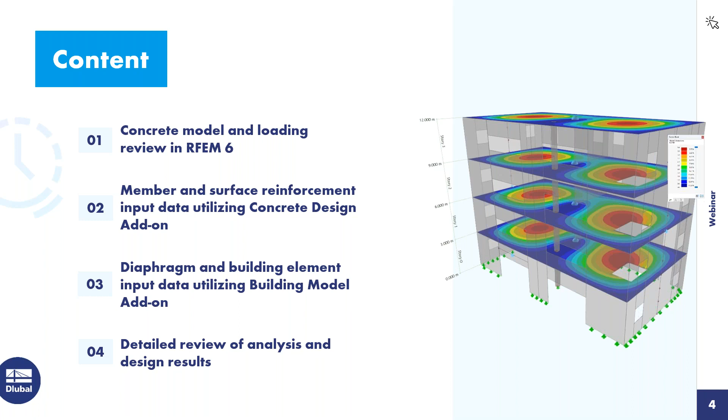And finally, throughout the presentation, we will be running both the analysis and design and taking a look at the results in more detail. So we'll immediately begin within our main program, RFEM 6 here. As you can see, I've taken the liberty to already model our concrete structure. But if we visit our base data by right-clicking on the model name, when you begin a new file, you will give it a model name. The type of model will be in a 3D environment, for example, today.

And under the second tab are our various add-ons. So RFEM is responsible for the full analysis of our structure. But if we wanted to take this a step further, and in particular today, to carry out the concrete design according to the CSA standard, then we would need to activate here that concrete design add-on. Now, under this third tab, you can see here that we will generate the load combinations automatically according to the NBC that is selected here from our dropdown, but many other international standards are also available. We also will be utilizing the 2020 standard.

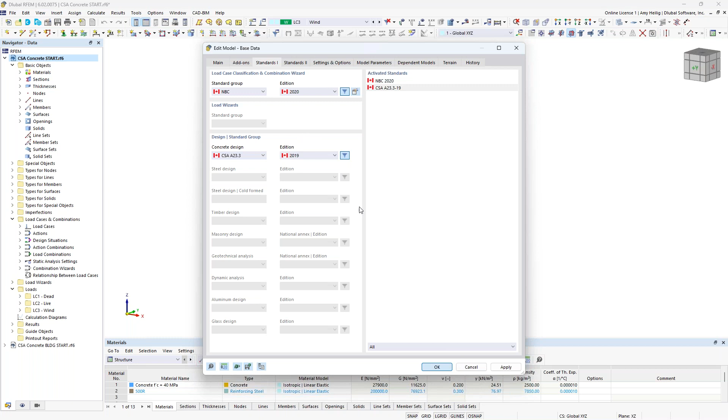As far as the concrete design, we will be carrying out the design according to the CSA A23.3, the 2019, but if you do have access to the concrete design add-on, you will also be able to run your design according to the ACI, the Eurocode, or other international standards offered. So once this information is input, we can go ahead and jump back into the main program RFEM here to review the model input data. And we'll begin with our materials. So over on the left-hand side, you can see that the concrete compressive strength that I'll be utilizing for all of our elements today will be 40 MPa.

If I double click on this material, I wanted to point out that the material type is set to concrete. And when we do this, we have an additional tab here to specify the creep and shrinkage properties of the material as well. So this will come into play a little bit later on with the long-term deflection. Now for our example today, I'm going to leave these options turned off, but just keep this in mind for those specific concrete materials. I also have here defined the reinforcing steel material, 500R. This will come into play also later on as well with our reinforcement input data for our elements.

So in addition to the materials, we also have our cross sections. You can see that I actually only have one cross section defined for our members, which are the columns kind of running up through the center here of our structure. And double clicking on these particular members, you can see that the member type is set to beam. So this would be any standard beam or column element. What also may be common with concrete design is the member type rib. So we can actually place a beam element below the depth of the slab here, integrate the internal forces to design this as a T-beam.

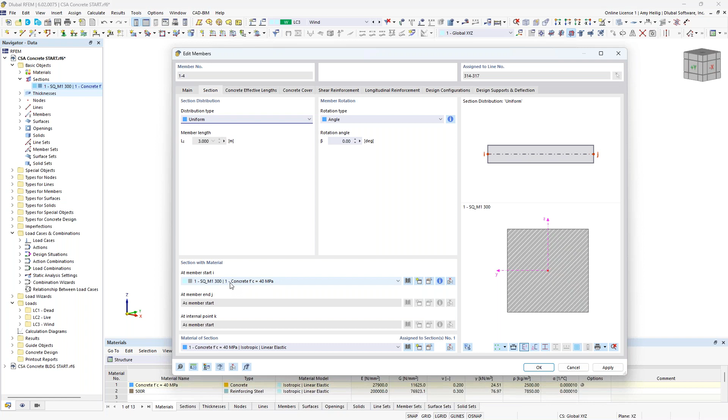Now, I won't be utilizing this type of member in today's example, but in the previously recorded webinar for ACI 318 design, I do go more into depth with the member type rib as well as the design, so you can refer to it there. For today, just using the standard beam type for our columns. We also have here the cross section and the material that are assigned to the member. You can see this is just a standard 300 millimeter by 300 millimeter with that same concrete compressive strength assigned as the material.

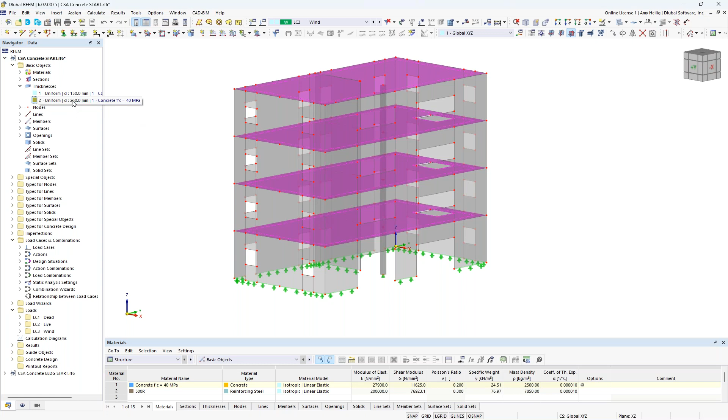As far as our surfaces, we have two different thicknesses assigned to these surface elements. For our walls, they are all utilizing a 150 millimeter thick definition type here. And then as far as our floor or slab elements, these are going to be slightly thicker at 250 millimeters.

With the modeling of our surfaces, you'll notice that all of these segments here for spandrels and shear walls are modeled as individual surface elements. This is a little bit better output when it comes to the building model that we'll visit later today in our example, but this is in contrast to modeling one continuous surface here and inputting standard openings as you see up here in our toolbar.

So again, just a little bit better behavior when we're talking about the building model add-on, but we are working in the next several weeks to optimize this so that the building model can also handle standard surfaces with standard openings. But for today, just notice that all of these are individual surface elements that are modeled around the openings themselves.

And finally, you will see down here at the bottom our supports defined. So just a standard pin type application here at the bottom of our 2D surfaces with a line support. This pin support will be applied at every FE mesh element at the base of these walls. We also have a single nodal support here at the base of our column.

So now that we have reviewed the general information for our model, I want to get into the loading. We'll go ahead and access our load cases and combinations dialog box. As you can see under the base data, we have the same information that we defined within the dialog box we previously saw, where we generate those load combinations automatically according to the NBC 2020. When this checkbox is checked, we will generate those load combinations automatically. Alternatively, you can uncheck this option to manually generate the load combinations instead.

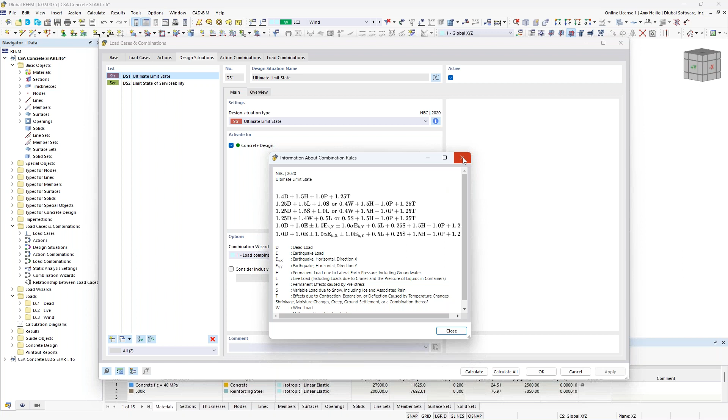A design situation is nothing more than grouping together the factored load combinations according to the NBC standard for this first design situation. And we can review this data directly from the NBC standard with this info button. The unfactored load combinations are part of this second design situation. Again, we can reference the code here. All load combinations will be carried out according to a second order analysis.

And finally, we jump to our load combinations tab. You can see the individual load combinations listed out, and our factored load combinations in red belong to that first design situation, and our unfactored load combinations here belong to the second serviceability design situation.

Now, before we move back to the RFEM model, I want to quickly explain how we can take into consideration the I-crack factor requirements from the CSA standard, in particular from clause 10.14.1.2. This is a requirement from the standard that we apply this crack factor to the stiffness of our elements within our concrete model. The problem is that when we draw this model, this is not automatically taken into consideration. Rather, we need to give that definition type directly under the load cases and combinations.

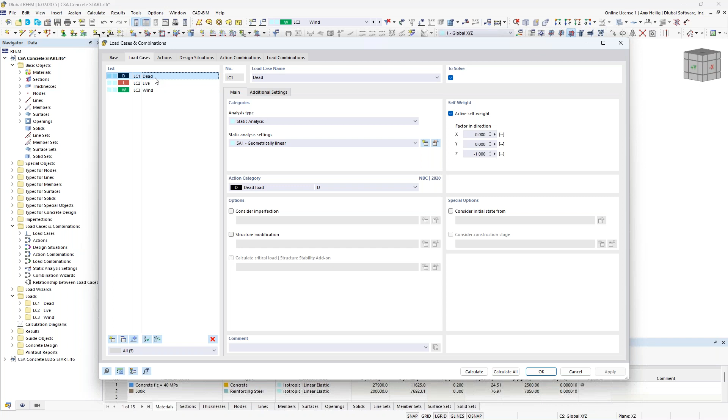So we'll begin back here under the load cases where we have the structure modification checkbox. What I'm going to do is create a new definition type here for both our members and our surfaces. Now we get two additional tabs up here at the top. You'll notice under the member modification, I want to create a new definition type here.

And we have an additional drop-down box where we can directly select the CSA A23.3. With this, we're going to refer directly to table 10.14.1.2, and we have 2 different component types: columns and beams.

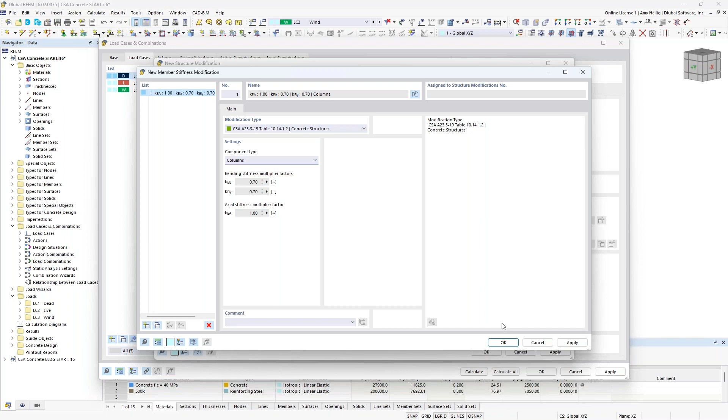For today's example, we only have columns available in the model, so the I crack factor directly from the CSA standard for bending stiffness will be applied to those members. Once we create the definition type, I need to graphically select the members here that I would like to apply these to. I'm just going to choose the 4 column elements, and you can see the numbers 1 through 4 are now populated within this table.

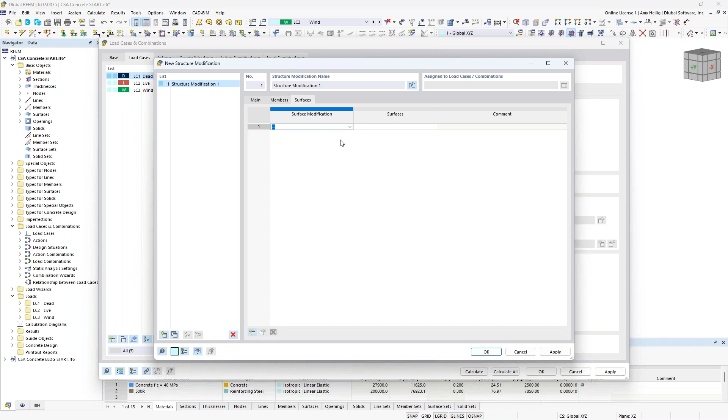We do the exact same thing with our surfaces tab. I use my drop-down box here to create a new stiffness modification, and I utilize my drop-down box to yet again select the CSA standard. Under the component types, we have 3 different options, and we'll begin with walls uncracked. So we have the relevant I crack factor that will be applied to our 2D surfaces for our wall elements in bending and torsion. I click OK, and now I need to graphically select the wall elements.

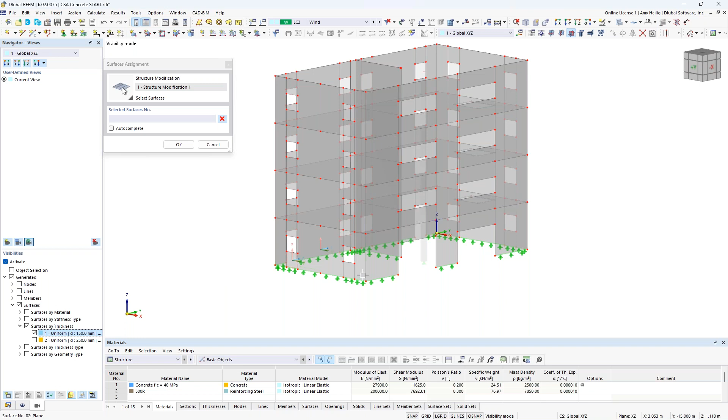I could individually select these or use my selection box graphically, but another easy method is to take advantage of the navigator view options here, where you can see various elements. We'll begin with our surfaces, where I can select all surfaces graphically by their thickness. I can go ahead and select all surfaces that are 150 millimeters thick, which will essentially be all of my wall elements. I graphically select them, click OK, and now those values are input into this table.

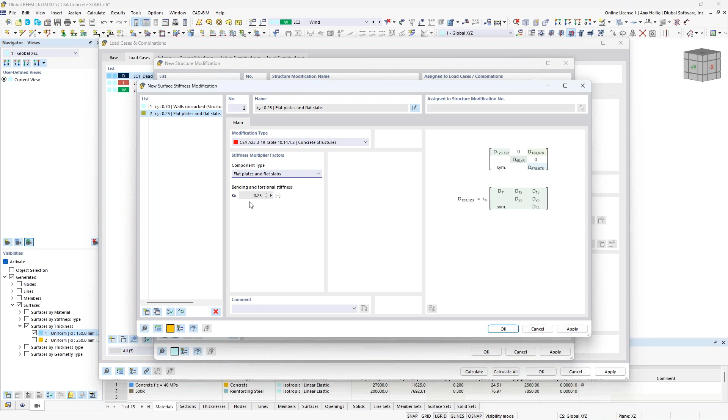Now we lastly need to create one more stiffness modification. We're going to use our drop-down for the CSA standard to select flat plates and flat slabs. The I crack factor is updated from the code to 0.25. I click OK, and now I need to graphically select the members that this will be applied to. So I'm going to modify my views here to the surfaces that are 250 millimeters thick, which are all of my floor slabs. I select those, click OK, and now this information is complete.

Now that we have this structure modification definition, we want to apply this to the additional load cases here. I can select both with my shift key to simply activate this modification yet again. But it's not enough to only apply it to the load cases; we also need to apply it to our load combinations.

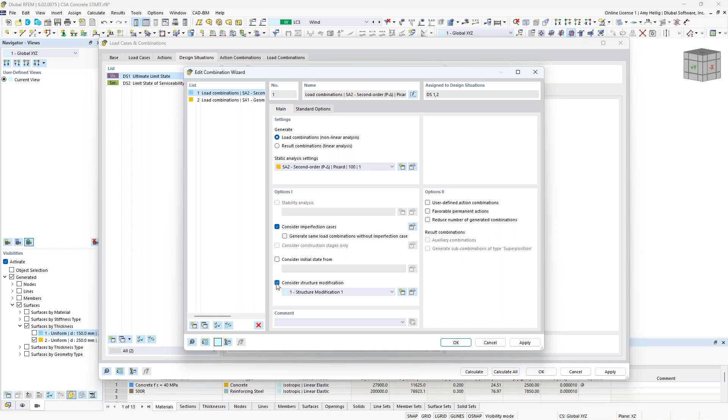The easiest way to do this is to go to the design situations themselves. I had mentioned how we're automatically running a second order analysis with the combination wizard settings down at the bottom. If we go into the detail settings for this, we also have that exact same checkbox that we can turn on here for the design situation, which will in turn affect the load combinations.

But I'd really like to apply this I crack factor only to my factored load combinations for the ultimate limit state. For my serviceability, I really don't want to apply the I crack factors. Instead, what we refer to for topics like deflections under serviceability is the effective moment of inertia, called out in clause 9.8.2.3 within the CSA standard. When you do the design within the concrete design add-on, the effective moment of inertia will automatically be calculated.

So I want to go ahead and turn off the I crack factors for my unfactored load combinations. A very easy way to do this is to make a copy of my existing definition type and simply turn that off with the checkbox option. Now with my factored load combinations, I leave this with my first definition type, but for my unfactored, I'm going to use my drop-down box to select that third definition type.

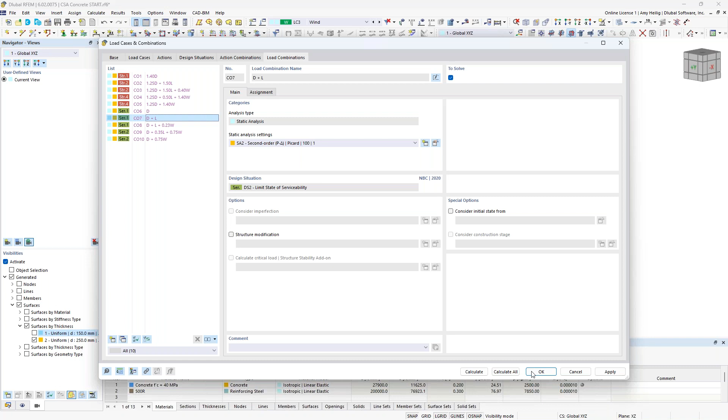If we jump to the load combinations, we now see our factored load combinations here with the structure modification turned on, and our unfactored load combinations will have this option turned off. Okay, so now that we are complete with the load cases and load combinations, and we've applied the I-crack factor requirements from the code, I want to go back to the RFEM model here just to take a look at the display of our loads.

Again, very simple application for today. For our dead load, you'll notice here that I just have simple surface loads applied at each floor level of 3 kilonewtons per meter squared. When we look at the live load, exact same concept, and you'll also see here that within RFEM 6, we can right click on these loads and decrease the size of them graphically with this slider tool. But I've essentially applied these live loads at the interior floors only.

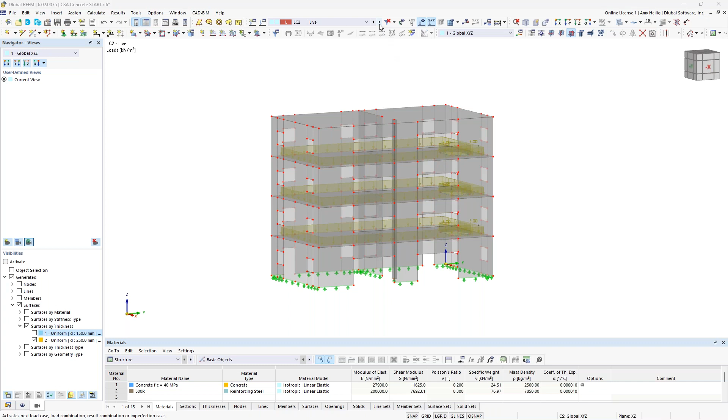And finally, we also have here a wind load—again, very basic loading for today. We have 2 kilonewtons per meter squared in the global X direction, and then 1 kilonewton per meter squared as a suction force on the other side. I recognize realistically we'd probably have additional suction forces on the roof, and we'd probably also want to consider these openings and apply them as line loads around the edges of our door and window openings.

But for today, again, just sticking with this simple application. So now that we have our 3 load cases defined with the loading applied to this structure, we can jump down to any one of these load combinations and cycle through them to see the loads applied on the structure simultaneously, taking into consideration the load factors as well.

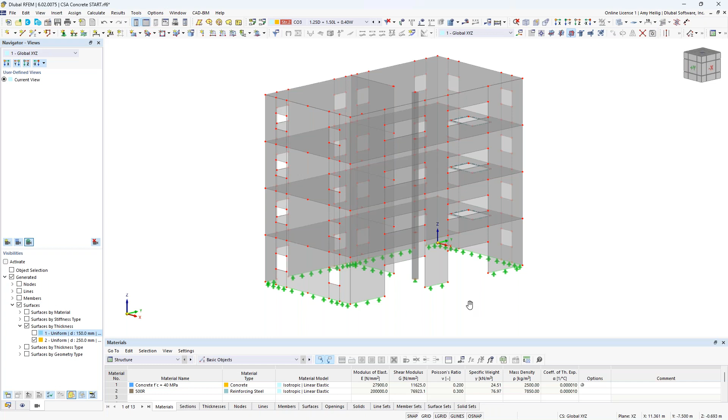All right, so now we have reviewed the loading. We are finally ready to input the reinforcement for some of our elements specific to the CSA standard. And we will begin here with the reinforcement input of our columns.

So I'll go ahead and hold down my control key to create a user-defined visibility for only these members. When I double click on all 4 of members, numbers 1 through 4, you'll notice that we have the design properties turned on here. This is just telling the program that not only do we want to carry out the analysis, but we want to take it a step further to actually design these in the concrete design add-on.

And we have all the available tabs up here at the top. But notice when I uncheck these, all of these tabs actually disappear, just telling the program I only want to carry out the analysis with the concrete material, no reinforcement input.

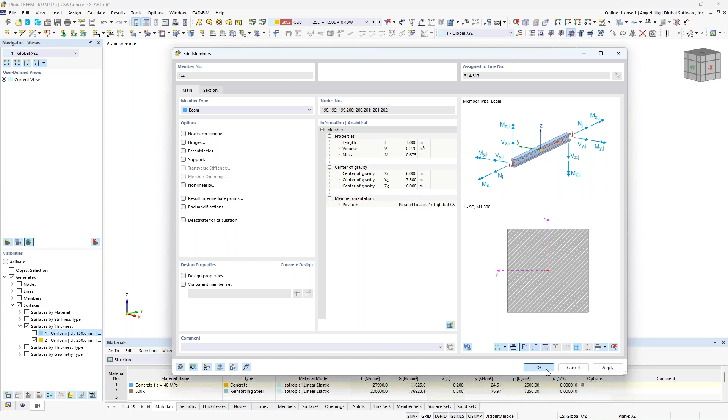So what we of course will do is input the reinforcement here, but assuming that we want to have the same reinforcement for all of these columns at all levels, I certainly could go into each individual member and input this reinforcement, but alternatively, we can take advantage of what we call the member representative.

So I'm going to access that same base data dialog box by right-clicking on the model name and jumping to the settings and options, where I can turn on the member representatives checkbox. What this is going to do is group together members that are really similar or identical in most ways, including materials, cross sections, and length. So now when I click OK, I get a new option within my navigator called Member Representative, and this will group together these 4 identical members.

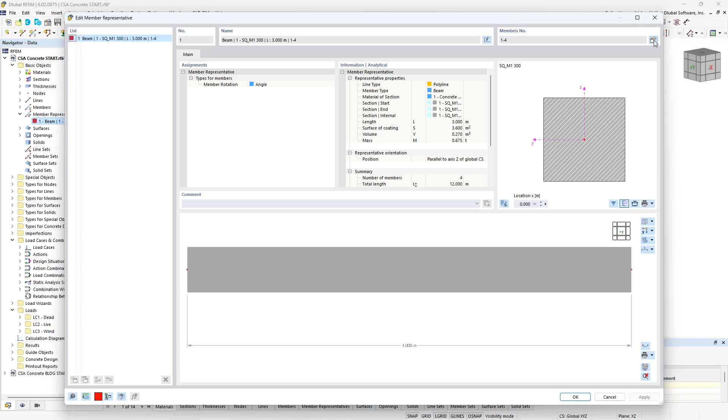By double clicking on the member representative to open up this dialog box, you can see that it includes members 1 through 4. And if I go into the edit members setting in the upper right corner, we're back into the same dialog box. I can turn on the design properties for those additional tabs here. But again, instead of individually inputting this reinforcement, I'm going to click OK, and all of these exact same tabs will be available in the member representative.

So this way, if I need to make any modifications to this reinforcement, I can do it through the member representative, which will in turn make those same changes to members 1 through 4. So we'll begin by working through these tabs up here at the top—the first one, the concrete effective lengths.

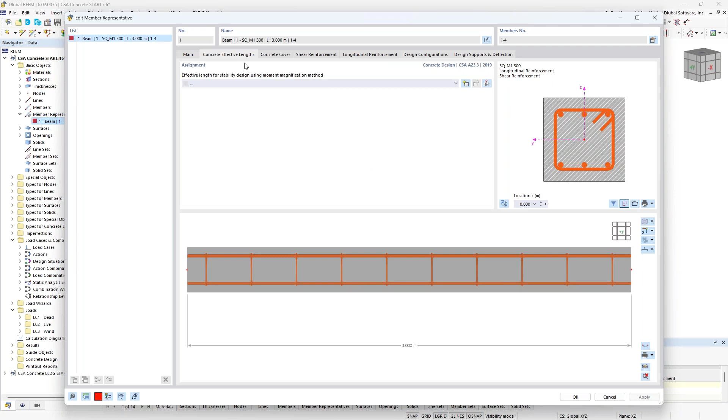This is only if you're going to carry out the moment magnification method, and because we are running a second order analysis, this is not required. Moment magnification is required for first order analysis. So essentially we don't need to do anything within this particular tab, and we can leave it empty and move on to the next. We have here the concrete cover.

So I'm going to specify 30 millimeters for my concrete cover for these columns. Under the shear reinforcement, this is where I'm going to specify my stirrups.

So under the first dropdown, I choose the stirrup type, and I'm going to go ahead and choose the default first option here. The material is also set—I already have this reinforcing material defined within the model, so I can just simply select it from my drop-down box.

But if we did not have that reinforcing material available to us, we can click on the 3 dots here. This will bring up our material dialog box where we can access our material database. Utilizing the filters over on the left, we can filter to Canada, the material type set to reinforcing steel, the CSA standard, and then we have these available reinforcement materials from the library directly.

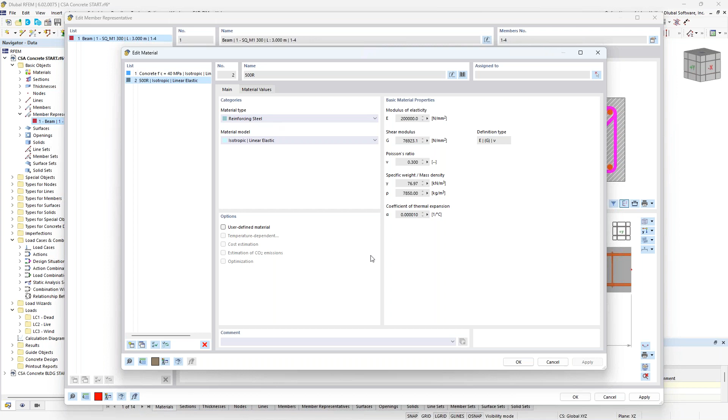If we choose one of these reinforcement materials and want to make modifications, we can always choose the user-defined material option checkbox that will allow us to make modifications for a user-defined material. For today, we already have this 500R defined for my reinforcing steel, so we'll go ahead and utilize that.

Now I want to select within this drop-down box the bar diameter, so we'll go ahead and select the number 10s here that are available with this first option. I specify the stirrup spacing such as 0.3 meters, and the number of bars will be set to 10. Notice that the graphical display down here at the bottom will go ahead and update as I input this information.

Now, you do not have to set the same uniform spacing and type of rebar across the entire member length. It might be very common for beams, for example, to have more shear reinforcement at the member ends versus the middle. We can simply create new definition types with this button here, and then specify exactly the start and the end of the shear reinforcement definition. But for today, for our column, we're leaving this as uniform spacing with those number 10 bars.

Moving on to longitudinal reinforcement. You can see by default the program has set this to symmetrical, which might be more common for a beam. For a column, we want to choose the drop-down option uniformly surrounding. Again, that 500R material will be selected here. We have a couple checkboxes to place the longitudinal reinforcement in the corners.

This is really more applicable for T-beams. You can see that the reinforcement is already placed in the corners, so nothing to do with both of these checkboxes. We specify the number of bars, 4, and then we will also set the bar size within our dropdown. We're going to use those number 20 bars here as well.

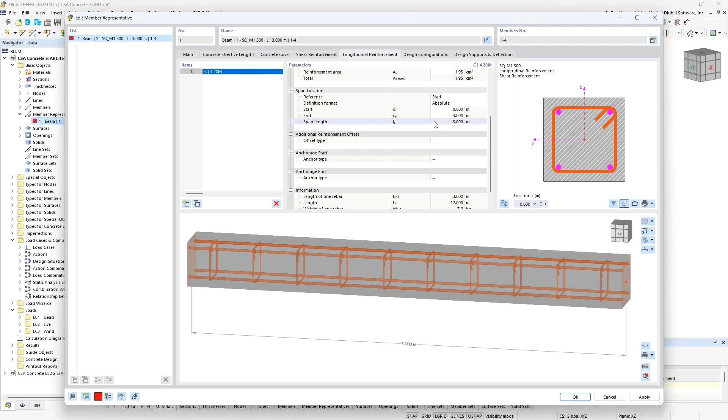So now we have finished the reinforcement input. We jump now to the design configurations tab, and we have here two configurations. The first is the ultimate, so we go ahead and take a look at the default settings here. This is going to be information that is specific to the ultimate limit state design for our members.

You can see here all of the various options that we can turn on or off, or maybe we want to change values, or choose a different method, whatever it may be. But also all of the code references for the most part are listed out here, so you'll easily be able to refer to the code to understand which setting belongs to which requirement.

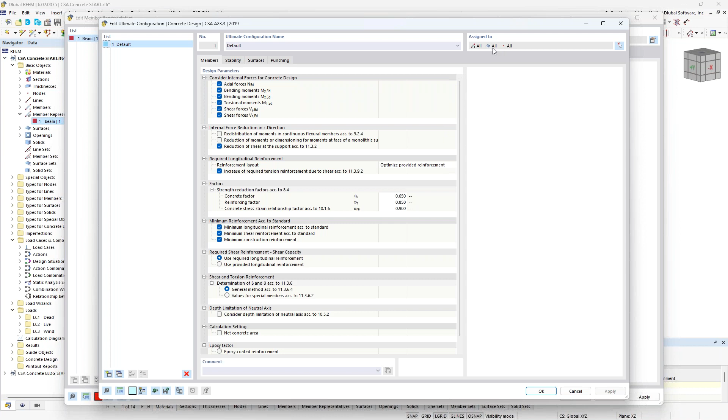We can also create additional configuration settings for different members. So currently we only have one definition type, but we can create a second definition type and assign it to different members and surfaces, and so on.

Same concept for serviceability. If we look at the detail settings here for the default SLS design, we're going to see information specific to serviceability, such as the crack control according to clause 10.6.1. We also will check deflections of the members.

You can see here the limiting deflection ratio for members that are supported at both ends versus a cantilever member. We also have here the calculation of time-dependent deflections. The default option here is to refer to clause 9.8.2.5, where we input the duration of the load. What this will simply do is apply a deflection multiplier for the sustained loads to the instantaneous deflection. This is certainly a very simple application here.

Alternatively, if we want to take into consideration creep and shrinkage from those material properties that I mentioned at the beginning of this example, this is going to be a more theoretical and exact approach for creep and shrinkage. For this, we're going to take the approach from ACI 435, as well as the same approach that's followed within the Eurocode, as there really is no specific requirement from the CSA on this topic. For today, we'll just leave this as the simplified time-dependent factor here.

So these are the various settings with the serviceability and ultimate configuration settings that we'll utilize within that concrete design add-on. Finally, we have here the design supports and deflection. When I don't do anything within this particular tab, the program is going to assume that this member is supported at the member start and the member end at exactly these points shown here. If we have a cantilever, then we certainly want to define a support at either the member start or the member end.

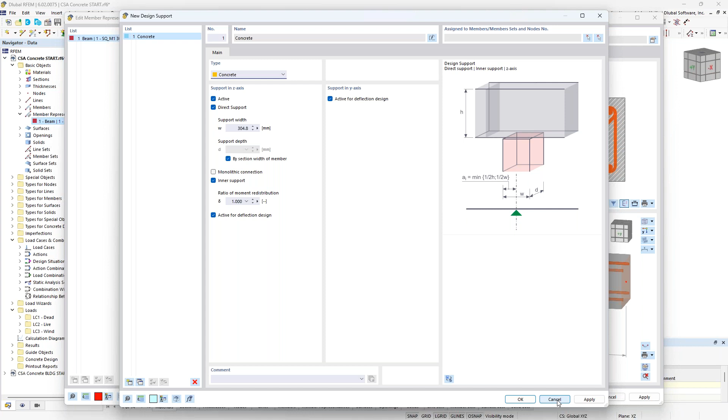So maybe not so applicable here with our columns. We'll just go ahead and leave this as default, where all forces are taken directly at the member ends. So now that this information is input within our member representative, what you would typically see is the reinforcement shown here graphically. And I'll turn this into wireframe view. You can see here the longitudinal and the shear reinforcement shown.

Okay, so now that we have the reinforcement for our concrete members, let us go ahead and cancel out this visibility and let us move on to the reinforcement of our slab. So I will begin with the slab that's shown here at the first floor, and we go ahead and double click on this element. You'll notice that we have the exact same checkbox available here for our 2D surface elements. This is telling the program yet again, not only to carry out the analysis, but also to perform the design within the concrete design add-on.

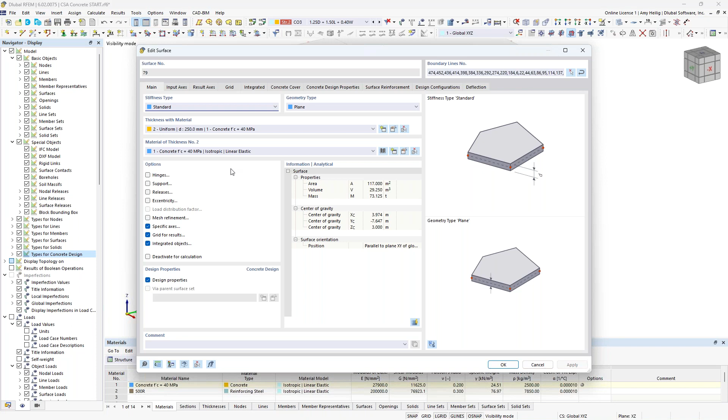So we will move through these tabs. We will start with the concrete cover, where we're going to increase the cover distance here to 40 millimeters at the slab top and the bottom. The concrete design properties. This is just simply telling the program that when I define my first longitudinal reinforcement, which direction should this be related to in terms of the surface's local axes. And the default here is the local x-axis.

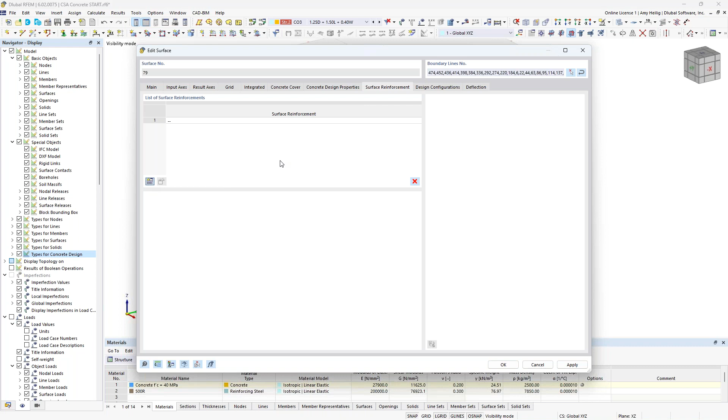So once I get into the surface reinforcement here, what we can do is to create a new definition type. I'll create this new definition type here. And this dialog box pops up that initially has our first dropdown here that's asking, where do we want to place this reinforcement on the surface? Do we want to apply it to the entire surface or just particular areas? So for our first definition, we want to apply this to the entire surface.

The second dropdown is going to be our material, again, that 500R that we already have defined within the model. The reinforcement type can be a welded wire mesh, it can be a rebar, or if we are placing shear reinforcement for one-way shear design, we can specify stirrups. We will go ahead and utilize the rebar option for today. And in my dropdown, I can select the number 15 bars here, and my spacing is going to be at 0.15 meters. So this is the longitudinal reinforcement now in the local x-axis of my surface.

But I'm likely interested in placing also transverse reinforcement in the local Y direction. Well, we can easily do this by checking on the checkbox here at the bottom. I select my bar diameter here with 15M, and then my spacing will also be 0.15 meters. And now we have this longitudinal reinforcement in both directions for both the top and the bottom across the entire surface.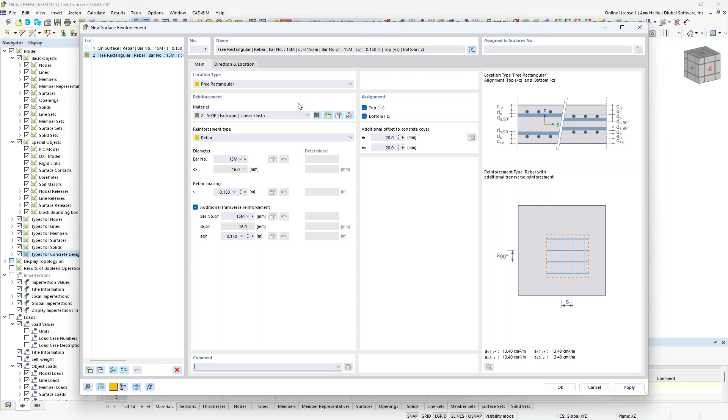Now, if we need additional reinforcement at locations such as columns framing into the slab or walls, we can simply create a new definition type here. And instead of the location type set to the entire surface, we can set this to free rectangular. The reinforcement type might be rebar. We could select 15 at 0.15. We also want transverse reinforcement. Same concept here, spacing at 0.15. I could even add in an additional offset here to offset from my number 15 bars in this first definition type.

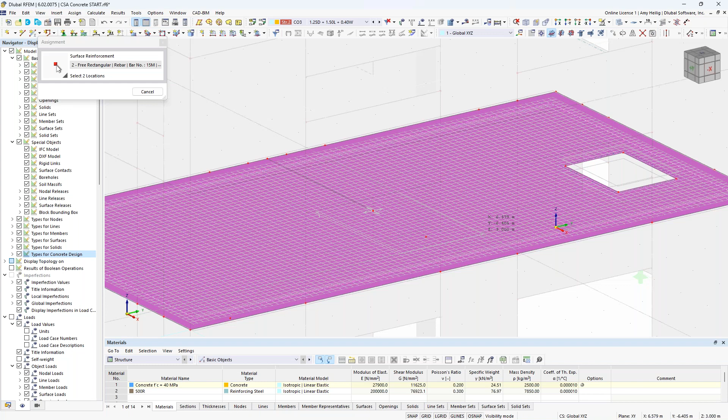But under this second tab, this is where we can graphically place this reinforcement in certain areas of the surface. So you'll notice here that if I turn on my grid settings, just to provide a little bit additional guidance here, I can then just click on 2 points, which I know is a little bit difficult for you guys to see, maybe over my column and my wall at the center of the slab where I'd like to apply this additional reinforcement. The coordinate points are automatically populated here, and now we're taking into consideration both of these reinforcement definition types. What else has been recently released within RFEM 6 is this new auto function.

So if we would prefer the program to optimize the bar size for us based on the required reinforcement from the analysis and design, we can choose the auto function. When we choose this, a dialog box pops up that says what minimum size do we want, what maximum size, and then again, the program will optimize that bar diameter for us.

In addition to the auto function for the bar number, we also have the auto function for the spacing. So when we choose the auto function here, we specify the minimum spacing, the maximum spacing, and the increment. And again, the program will optimize this based on our required reinforcement from the analysis.

Now, it should be known that you cannot use the auto function for both the bar number as well as a rebar spacing. You kind of need to choose one or the other here, but it also can be applied to the transverse reinforcement. Now, for today, I'm going to totally delete this definition type, and we will just utilize this uniform longitudinal reinforcement throughout the entire surface.

Also, this surface definition can be applied to more than one surface. So if I want to use the same reinforcement at every single floor level for my floor slabs, I can easily apply this same definition type to multiple surfaces. This way, if I need to make any modifications, I go back in to edit only one definition type here, which will then affect all of my surfaces.

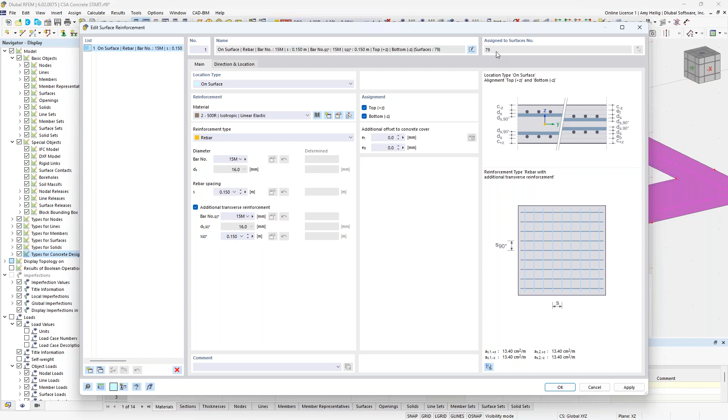So now that we have this specified here, what I'd like to do is to go to the design configurations. Very similar concept to what we saw with our members. For the ULS design, instead of the members tab, we go to the surfaces tab. Again, just various options for the ULS design specific to our 2D surfaces.

Maybe one important topic is we would want to maybe change this, whether we are designing a plate or a flat slab versus a wall element for maximum longitudinal reinforcement. Again, we can create multiple definition types to assign them to our walls versus our floor slabs.

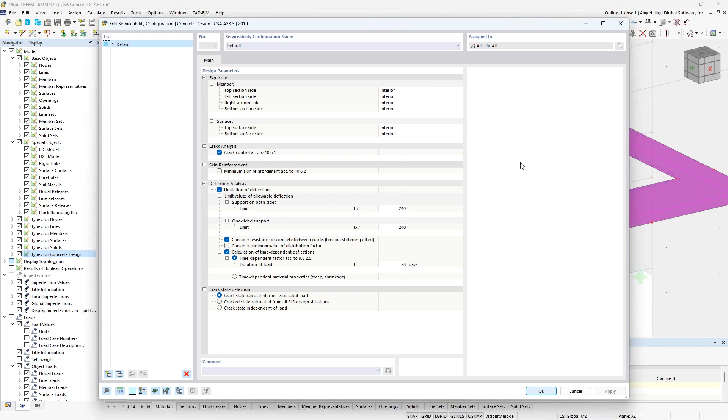So once this information is input, we'll check out the serviceability. This actually is identical to the configurations for our members as well. We're also going to check deflections here for our surfaces. Again, create multiple definition types if you'd like to have maybe different limiting deflection ratios for members versus surfaces.

And finally, the deflection tab. So this allows me to specify if this surface is supported at both ends or is it a cantilever. We need to know this information for the limiting deflection ratio.

All right, so now that this input information is complete, what we should see here then, if I cancel out of my visibility, is the reinforcement shown graphically for our surface as well. So this is going to be that longitudinal reinforcement at both the top and the bottom shown graphically. If this does seem to get in your way graphically, just go ahead and navigate to the Navigator Display tab here, and up at the very top, we can turn off the types for concrete design.

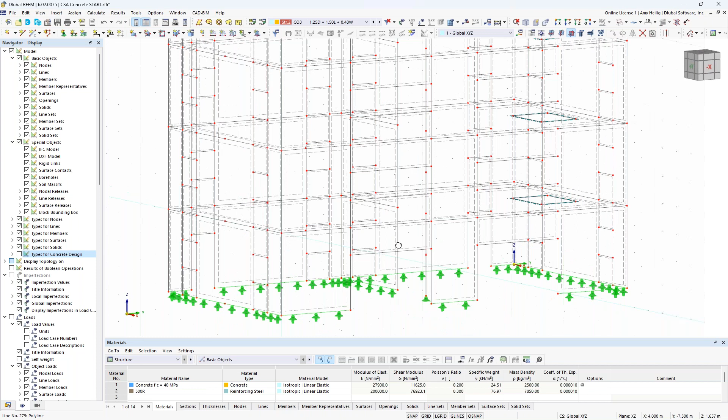So the final topic here is going to be punching shear. This is also a new feature that we have recently released within RFEM 6 for both the ACI and the CSA standard, is the ability to check punching shear.

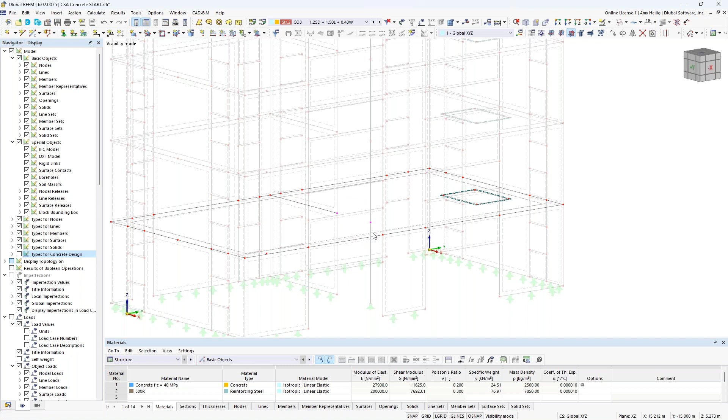Well, when we look at this column framing up into this slab, this is probably an area that we would want to carry out that design at this particular node, but we also can check punching shear at wall ends as well. So holding down my control key, I'm going to select both of these nodes here and double click on them. We have an additional checkbox down at the bottom to turn on the punching design, again, specific to that concrete design add-on. And we now get an additional tab here for the ultimate configurations only for punching shear.

So we've already visited members and surfaces, but now we have this fourth tab specific to the punching shear design for the CSA standard. Now, it should be known that currently the punching shear is carried out with no reinforcement considered. We do plan to add in the near future the ability to specify the additional shear reinforcement for two-way shear design or punching shear design, but currently all checks are carried out with the unreinforced section.

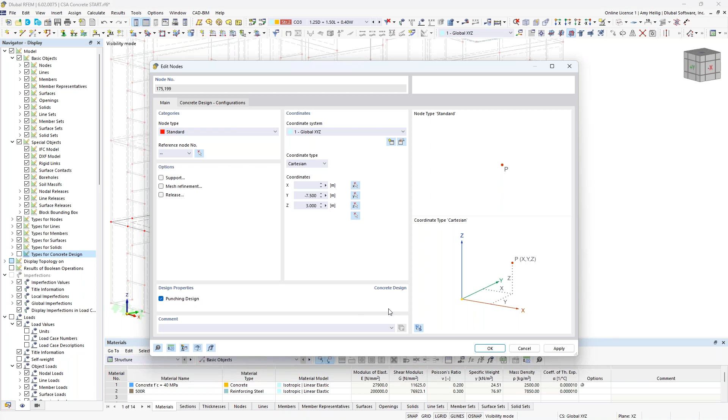So now that we have specified here this additional checkbox for these two particular nodes, we are ready to visit the concrete design add-on input data within the table here. So canceling out of this visibility mode, let us choose the concrete design here within our drop-down box. And this is only available because, again, I've activated that concrete design back in the base data. Well, under the design situations here, remember I said design situations are always needed to carry out the design within these add-ons, and here they are listed again.

So we have our ultimate limit state design situation that we want to tell the program to go ahead and carry out the ultimate limit state type for all of my elements that I plan to design. We also have our serviceability or unfactored load combinations here with this second design situation type, and we want to modify this here to the serviceability limit state.

Now you'll also notice within this dropdown we do have the earthquake limit state. So currently we can carry out the reinforcement detailing requirements for seismic according to the CSA standard. So keep that into consideration that it is the detailing only checks right now. Now we continue to move forward with development to do additional seismic checks in the future.

If you are interested though for the reinforcement detailing for seismic, you would just simply go back to our load cases and combinations. You can make a copy of our ultimate limit state design situation. We would have a third line here where we can now relate that to the earthquake limit state type.

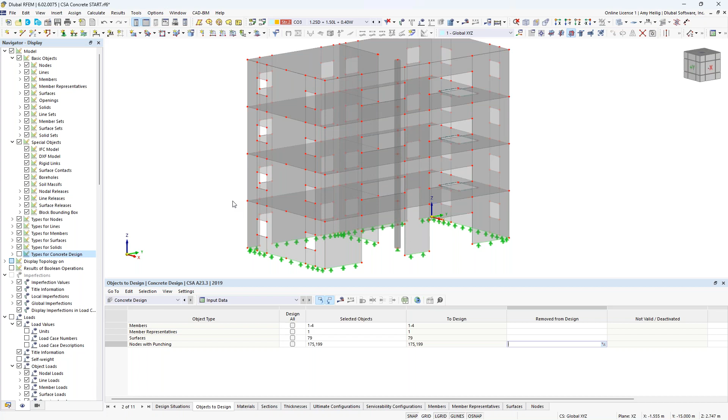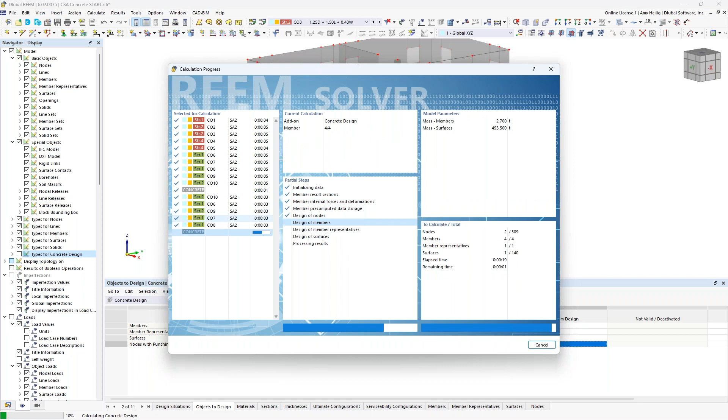So now that we have input in all of this information, we're ready to run our calculation. And I do so directly within the table options. And you can see that the program will now cycle through all of my load combinations here for the analysis portion, taking into account topics like the I-crack factor. You'll also see here that we rerun the serviceability load combinations, and this all just relates to that effective moment of inertia that we need to recalculate to determine the deflection checks within the concrete design specifically. And finally, we carry out all of the additional ULS and SLS requirements to give us the design check ratios for all of these elements we have considered.

Now, before I get into the concrete design, let us back up a step just to view the static analysis that's available within our Navigator results option. So nothing to do with design right now, but you can see here that we're currently looking at the global deformations, and I can cycle through these different load combinations to see the deformation of the structure.

But we're also likely interested in topics like the member internal forces. Now, currently, I only have one set of members here for my columns, but we can view the internal forces graphically, such as the axial forces or the shear forces, bending moments. And all of this information is also available in table format as well. If we go to results by member, we can view that information rather than just graphically, but also in table format.

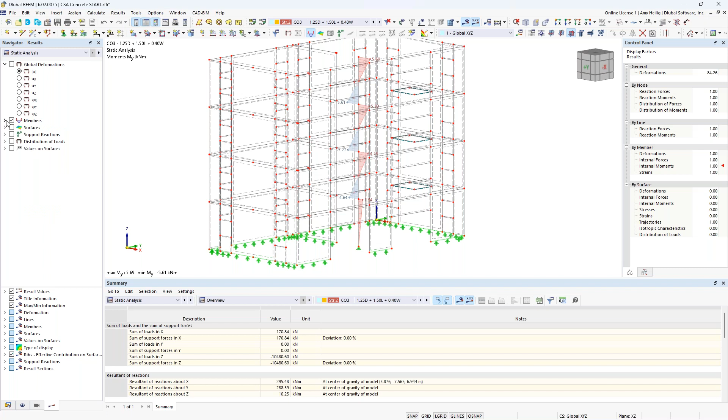It's also important to look at the surfaces. So what I want to do here is maybe we'll create a user-defined visibility for only that particular surface that we're designing. And we activate here the surface results, such as the basic internal forces. We have here MX, we have MY, MXY. All of this internal force information is used in the design of this slab within the concrete design add-on.

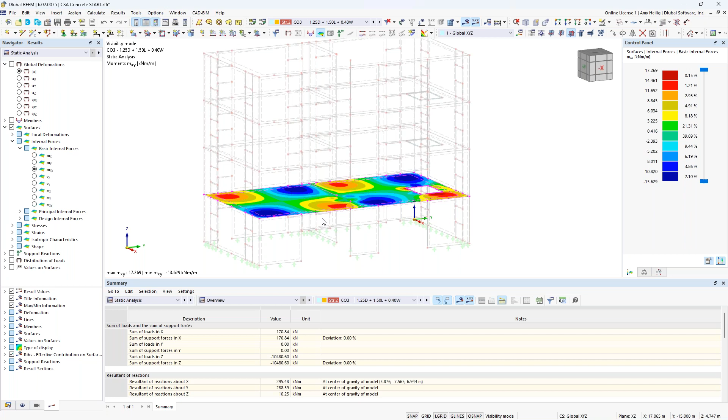What I want you to take note of is these membrane forces or in-plane forces, NX and NY. So you'll see here that we clearly have some high values for the in-plane forces of this particular slab. Keep this in mind because this topic will certainly change when we get to the building model add-on and we define diaphragms instead.

So now that we have quickly covered the output here from the analysis, we want to take a look at the actual design according to the CSA standard. So under the concrete design here within the table, we're just getting a quick overview of maybe where we have some problem areas.

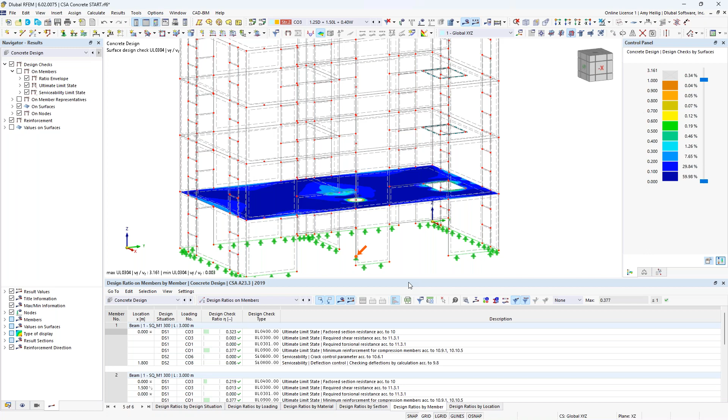But before we address these, which are mainly located in our surface, let us take a look at the design ratios on the members. And I can graphically turn on the design ratios of the members here so that we can see, again, specific to the concrete design add-on. So I'm currently looking at these design ratios tab here for each of the members, and notice that everything is synced up within the table as well as the graphical view, so we can view the design checks for the columns at each floor. And we have for each column the ULS checks and SLS checks.

If we wanted to take a look at the design check details for each one of these particular checks, we can access this here within our table. It's called Design Check Details, and this is new within RFEM 6. What this allows us to do is to view the equations line by line, along with the variables, the code references, everything is given here so that we can show you how the program has determined this specific design ratio for this ultimate limit state check.

We can add this information to the printout report. These calculations and formulas will update in real time in the printout report if we make any modifications to the model. Additionally, we can use our drop-down box here to switch to a different design check if we'd like to see those formulas listed out here. We can expand out our table if we're interested in seeing some of the analysis information or variables that again go into this design check details.

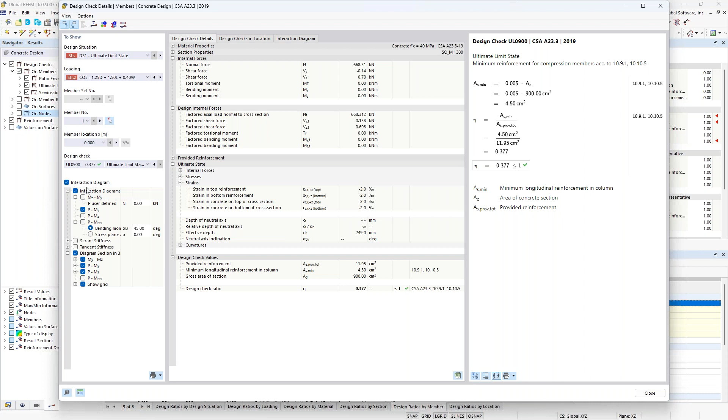Also new within RFEM 6 that we previously did not have in RFEM 5 is the interaction diagram. So we can activate this here and we get a third tab. And here we will see the 3D interaction diagram for our particular column under the applied loading. We can add this as a graphic to our printout report, but we also see the values here in table format. Additionally, we can see exactly which point we fall under within this moment interaction diagram under the applied loading for this particular scenario. So very powerful in the sense of all of the detail output information that we have added in RFEM 6 for the concrete member design.

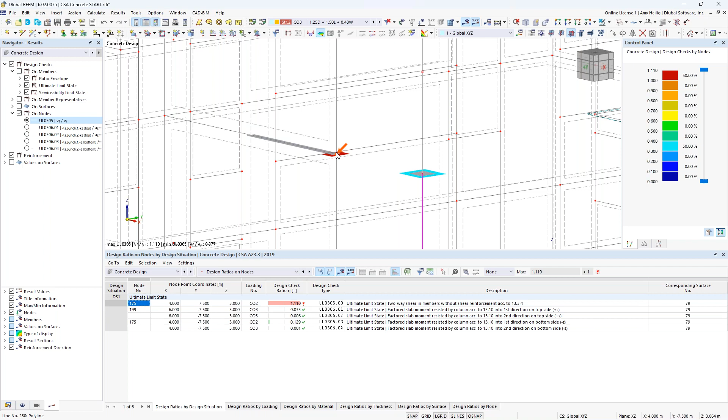So in addition to the design of the members, we also have here the design ratios on the nodes for our punching shear. So we'll go ahead and turn on the graphical display of this. Maybe we turn off the members, and we can view here in a bit more detail in table format as well as graphically the punching shear. So as mentioned, this is always considering, at least at this point in time, the slab is unreinforced for additional shear reinforcement, but this allows us just to view, okay, is the slab adequate without that shear reinforcement, or do we need to additionally take that into consideration? Looks like we're a little bit overstressed here with the shear design check for punching shear at this particular wall end.

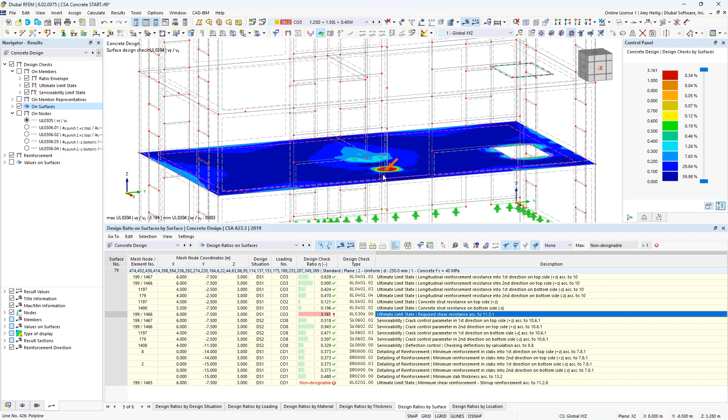And finally, we want to take a look at the design ratios of the surface. So we see this in table format here, and I'll go ahead and turn on the design ratios of the surfaces graphically. Well, a lot of these checks appear to be okay, but we certainly have some issues, especially when we're talking about shear checks at maybe where the column is framing in to the surface. So very high design check ratio here, over 3.0.

Well, the slight problem here is that, remember, we have this column framing into the beam here, and it's framing into this slab at this single FE mesh point here, this node shown graphically. And we know in reality, we're going to get better load distribution than what we can show in an FEA program where all loads are coming in at this single mesh point. So this is called a singularity. And this is not unique to RFEM, but all FEA programs deal with singularity.

So the question is, what tools do we have in the program to deal with singularities, especially with the concrete design, so that we're not over designing this structure, because in reality, again, we know we're going to get better load distribution. So let us go back to the basic model here, and I'll go ahead and create a user-defined visibility with only this surface. To address singularities, the first thing that we want to do is to double click on this node and to add in what we call a mesh refinement.

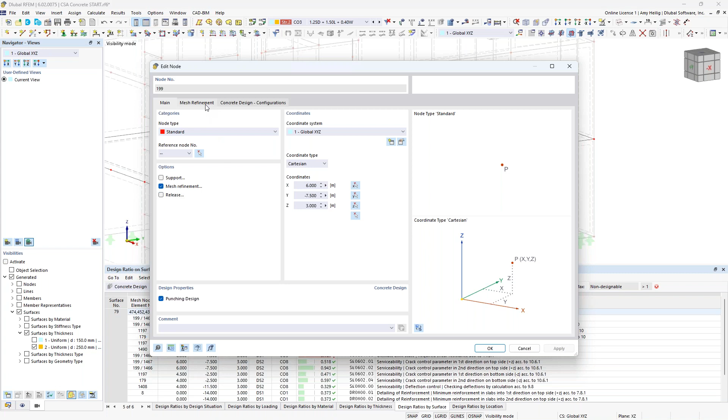So currently within the global model, we have a mesh setting of 0.5 meters. Well, a nodal mesh refinement here will allow me to create a new definition type where I can specify, for example, the radius of 1.5 meters, and to refine that FE mesh at 0.1 meters at the interior, and we'll transition to 0.3 meters at the exterior.

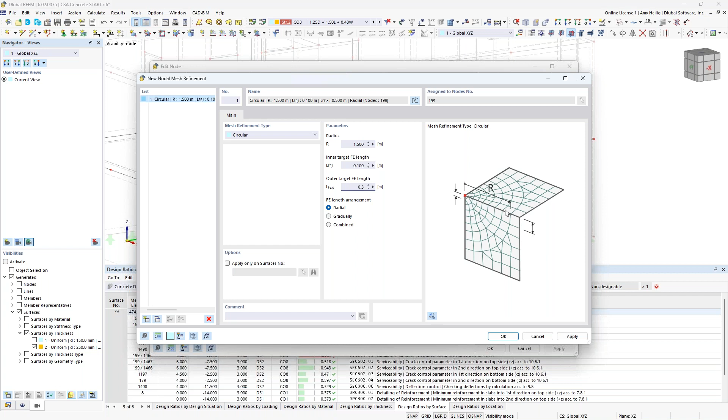So once we have this definition type set, we do need to clear out our results. We click OK, and now we see this additional symbol shown here graphically for that FE mesh refinement. So after we have set the FE mesh refinement, there's also an additional element that we want to add here.

And this is found under the Navigator Special Objects folder. We see Surface Result Adjustments. So we can right-click to create a new definition type. And what this will allow us to do is to actually average out the forces over a set area. So that way we can kind of smooth out those high peak forces.

We will specify this one as a rectangular shape with the dimensions set at 0.8 meters by 0.8 meters. I can graphically select this node here right where the column is framing into the slab. And I also want to select the surface that I would like to average out these internal forces. So surface number 79.

Now, a very common question is, well, what size do I set this average region or this surface result adjustment to? This is really up to the engineer's discretion. If you set this to something too large, then maybe we're not accurately capturing high internal forces here that really will occur. If you set it to something too small, then maybe we're over designing because we know in reality we're getting better load distribution. So for today's example, just a completely arbitrary value here of 0.8 by 0.8 meters.

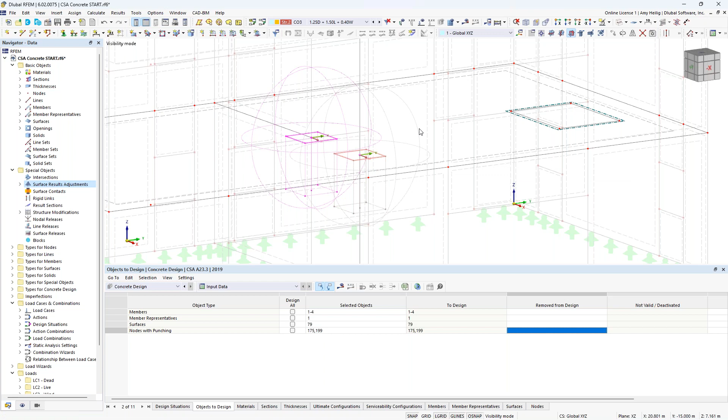So at the wall ends, for example, or reentrant corners, or where we have openings like this with, again, sharp corners, these all may be singularity issues within the program that we can apply these two additional elements to help address the singularity. So once we have applied the surface result adjustment and the FE mesh refinement, we're going to rerun the calculation here within the concrete design add-on.

So because we made modifications to the mesh directly within the RFEM model, we do have to rerun all of the load combinations because inevitably we're going to get slightly different load distribution when we make modifications to those mesh settings. We'll also, yet again, cycle back through the serviceability load combinations here for that effective moment of inertia and deflections. And finally, we'll apply the code equations from the CSA standard.

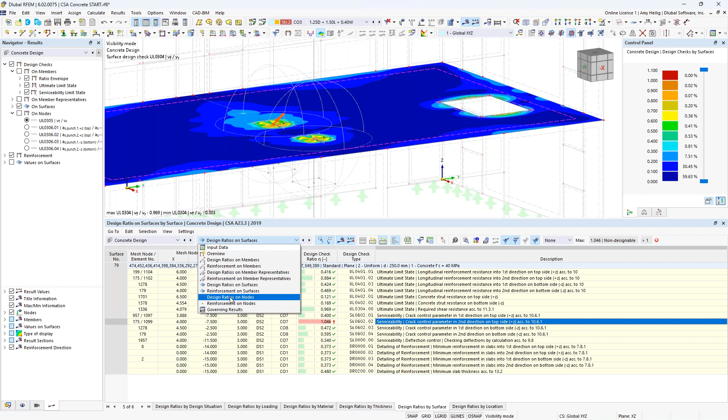So now that we have finished this calculation, let us jump to the design ratios on the surface. And I just want to point out that now a lot of these design ratios are below 1. We have one small issue here that's slightly above 1.0 with the serviceability crack control. But again, we've kind of smoothed out those high peak forces so we get much better results in addressing those singularities. The same concept is also applied here to the design ratios on the nodes. We can see that this value also dropped down as well.

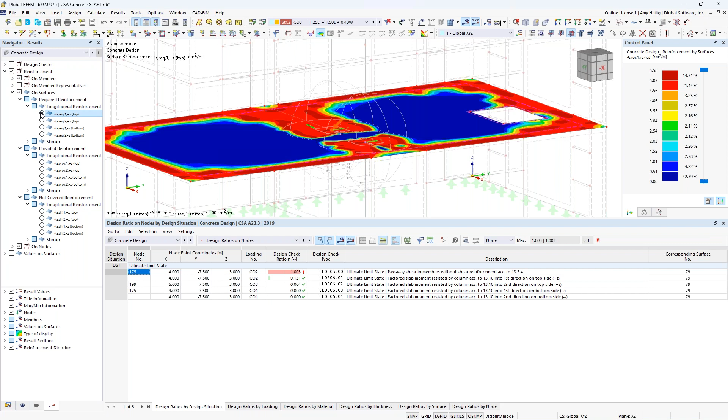The final thing just to show you within the graphical view is that currently we've been viewing everything based on the design check ratios, but keep in mind that we also have the reinforcement view here. And we can view the required reinforcement based on the analysis here in the longitudinal directions for both the top and the bottom. We can also view the provided reinforcement. So this is my number 15 bars at 0.15 meter spacing. This is uniform, so that's why we're seeing just one solid color here.

And then we have the not covered reinforcement. This is just the program simply looking at the required reinforcement, comparing it to the provided reinforcement. And if we are not meeting the criteria set forth by the analysis and design, we would see additional areas here in the slab where we would want to add more reinforcement, but it looks like it's adequate here for our example today.

Okay, so now that we have a general understanding here of the concrete design add-on, I am going to jump to an already saved model where we can touch on the building model. So I'm going to revisit the base data here. And by the way, this structure in the background is the exact same model that we have just been working with. The only change that I made here under the add-ons is I have now activated the building model. So what we're trying to do here is that RFEM is a general FEA program, meaning that any structure is possible to analyze and design.

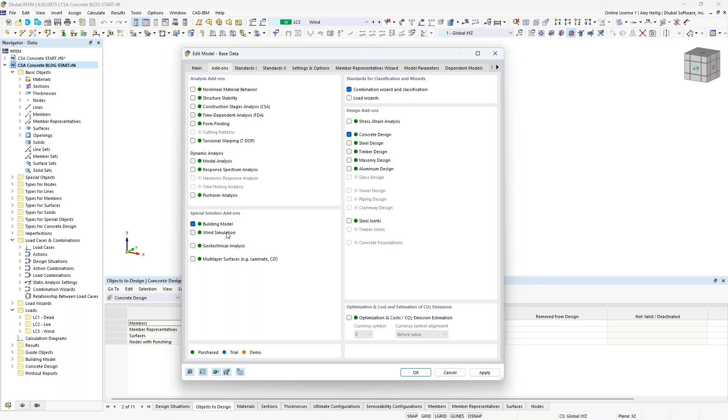We want to implement more building specific features into this general FEA program for those building specific projects. So when we activate this add-on and click OK, at first glance it seems like not much is different here with our input data, but we now have an additional folder called building model, where I can right click to create a new building story for my structure.

By default, this first story is created, but I need to modify what's the bottom versus the top of the story. I can do so by clicking on these 2 points at the base of the structure, and we see that the height is modified to 3 meters. We'll also see all of the input information specific to this story, based on all of the elements tied to it, including the walls, floor slab, members, and whatever else it may be.

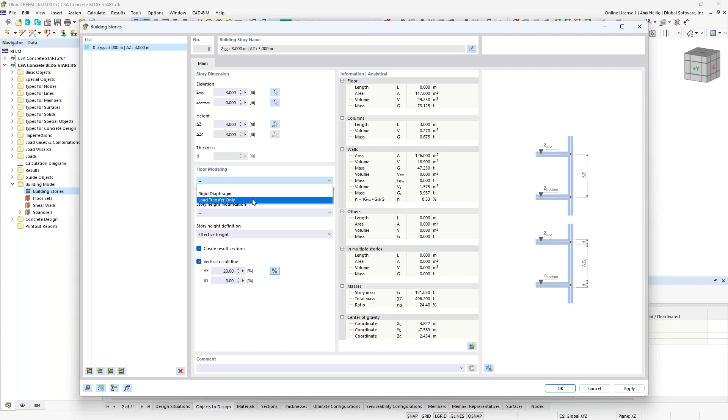We also have the floor modeling drop-down option to define a diaphragm. If I leave this empty, we simply continue utilizing the concrete surfaces already modeled in our structure. Alternatively, we have load transfer only, which you can think of as a flexible diaphragm, where we distribute loads based on the tributary area of all elements within this story. And then finally we have the rigid diaphragm, which is what we'll utilize for today.

Essentially, we consider each of these floor slabs with an infinitely high stiffness in the in-plane direction, and we actually extract each floor slab to run a separate calculation with the bending moments only. So I want to continue defining these additional stories, and I can do so with this button in the lower left-hand corner. The program assumes I have the same story height at each level, but of course we can make modifications if needed.

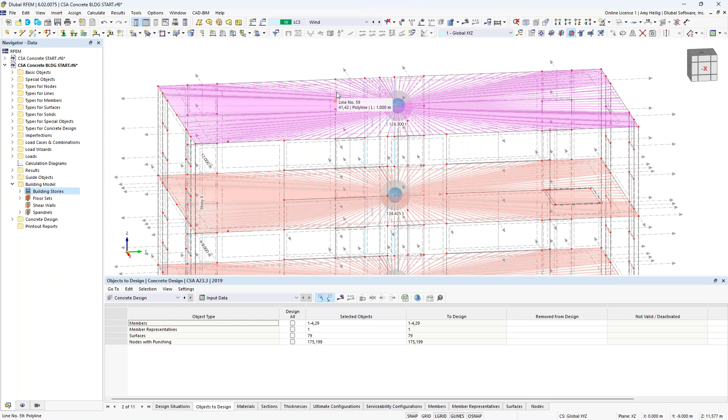When I click OK, each of these stories is now shown graphically with the dimensions and labels shown here. You'll also see, if I go into wireframe view, a very different view of each floor slab, and we notice all of these red lines shown here. These red lines are just representing graphically that rigid diaphragm.

Essentially, we tie together every single FE mesh point at this elevation with that rigid diaphragm constraint condition. Additionally, if we take a look at that concrete surface we've defined at this level and double click on it, the program has automatically modified the stiffness type to a floor slab rigid diaphragm. We can still carry out the design according to the concrete design add-on with the checkboxes shown here. Everything is fully linked, but you should notice the stiffness type is no longer standard, but now of the type rigid diaphragm.

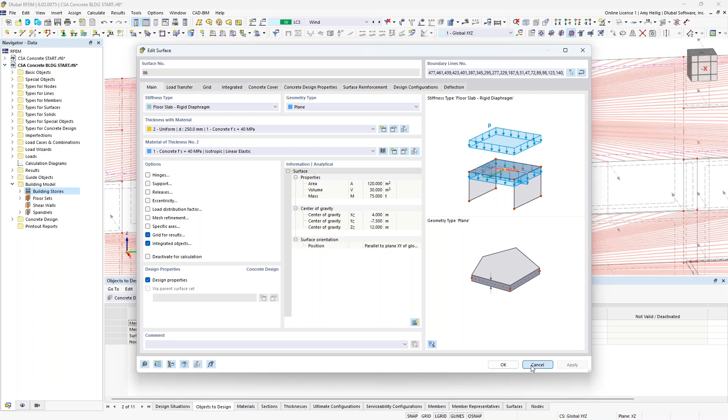If these rigid links seem to get in your way graphically, you can always turn them off with the second tab in our navigator, where we can turn off the rigid links under special objects. Additionally, you'll notice a couple balls shown in the center of these floor elements. The first is just the center of mass, but also the smaller one, if we double click, shows us our floor set.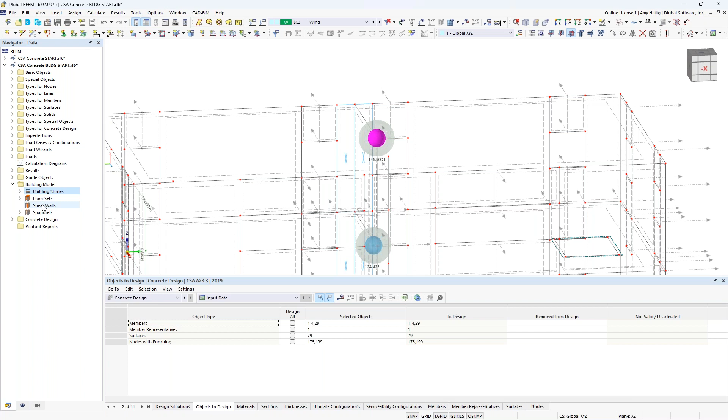With the floor set, this includes all of the connected surfaces, including all of those shear walls and the connected members. It will show us information specific to that particular story. So once I have defined the stories, I'm going to go back to the navigator to define shear walls. I'm going to turn this into a rendered view.

With the shear wall definition, I right click to create a new shear wall type. I will immediately select a set of shear walls, so we'll choose these ones arbitrarily on the left-hand side - 4 shear walls in the vertical direction. You can see those surfaces are generated here.

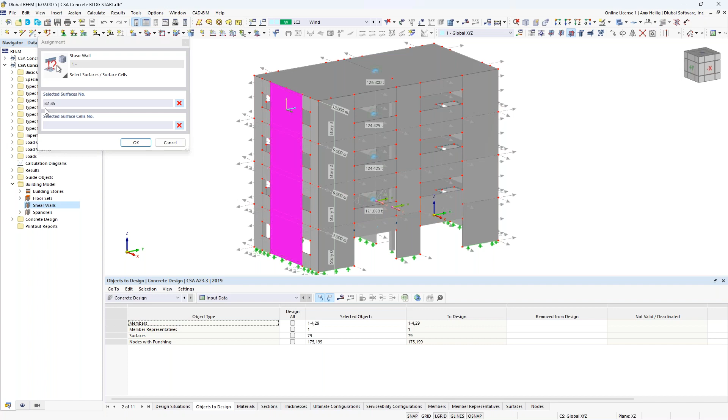What the program will do in my output is to create what we call a result beam. It's going to simplify the internal forces for these 2D surfaces and represent it as a member element. This will make a little more sense once we get into the result output from our building model add-on. But now that I've created this first set of shear walls, notice these are shown here with the cross section - I'm going to create a second set as well.

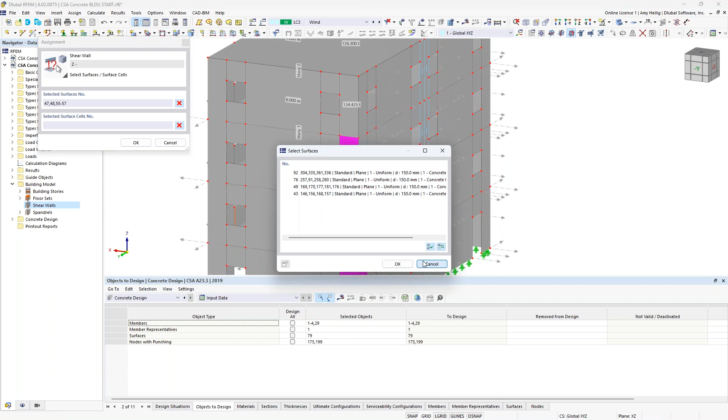The shear wall definition does not necessarily need to be in a single plane. For example, notice that I'm choosing the shear walls at the corner of my structure that have a 90-degree bend in them. I choose all 8 of these segments, click OK, and now the shear wall is actually represented by these 2 segments at a 90-degree angle.

We can take the result beam from this first set of shear walls and design the reinforcement in the concrete design add-on as a typical member. I'll show you that shortly with the spandrels. But for the shear walls at a 90-degree angle, it's not quite ready in development that we can also design the reinforcement. We can only consider one single plane right now, but this will still be helpful in the analysis output in just a minute.

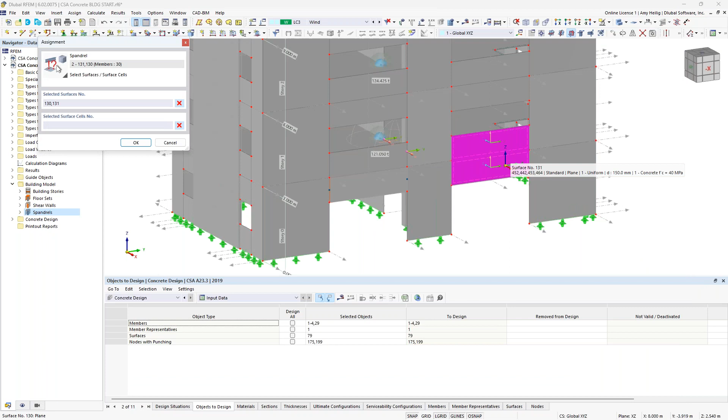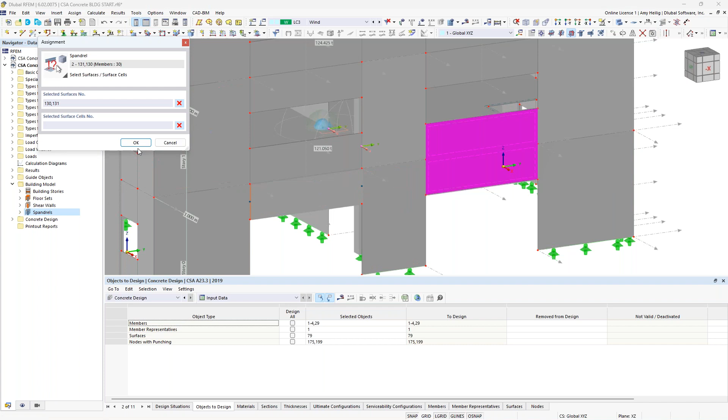Once this information is input for our shear walls, we want to do the exact same thing for our spandrels. I've already taken the liberty to define a couple of those spandrel definitions. We'll start with the first spandrel at the front of the structure, located above this larger opening. I also created a second spandrel definition by selecting these two surfaces over the larger opening. Notice I selected two surfaces here—if you have a spandrel that spans over a particular story or floor slab, that's no problem. Similar to the shear walls, we create that result beam to represent this 2D surface as a single 1D member. So just a simple example here for our spandrel definition.

Now that we have this information defined within the model, I'm going to quickly run one of the load combinations, such as load combination number 4. We'll go ahead and start the calculation. Notice that the program will actually create a few calculations here because we need to extract out that rigid diaphragm for the separate analysis, separate from the lateral system.

Now that the calculation is complete, let's turn into a wireframe view. The very first thing I want you to notice with the building model add-on is this first option at the top—we now have three options. We can view the main option, which is essentially the deformations for all of our wall elements and member elements, anything that is not part of that rigid diaphragm. We can more or less think of this as the lateral system.

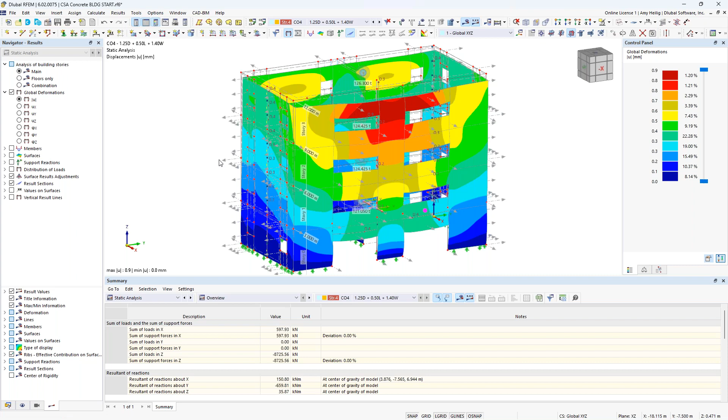We also can toggle here to the floors only, so now we can see the results for only these 2D rigid diaphragm surfaces. And finally, we have the combination here for all elements considered together.

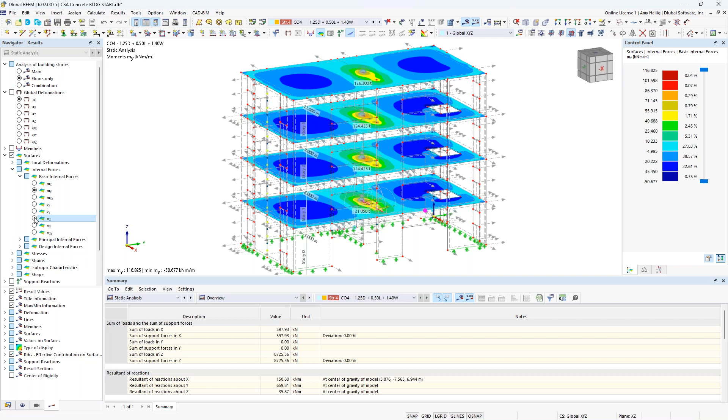Jumping to the floor elements only, not looking at the global deformations but rather turning on the surface internal forces—again we have MX and MY forces that are used for the concrete design, but a big difference from before is if you look at NX and NY, these values are now 0. That's because we have that infinite stiffness in the in-plane direction of our surfaces that have been redefined with the rigid diaphragm definition type.

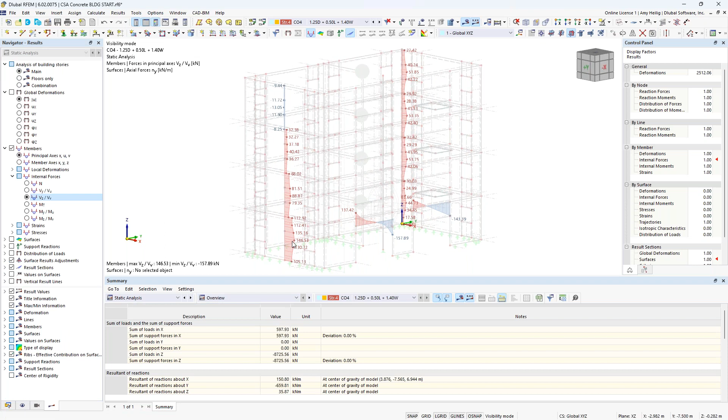Jumping now to the additional elements other than our floor slabs, I wanted to point out the member internal forces here, and show you what we call the result beams. We'll go ahead and activate, under our members, the members by type only our result beams. Let me turn those on. So what you'll see with the result beam view is the program summing up the internal forces for these 2D surfaces and representing it as a single 1D member element.

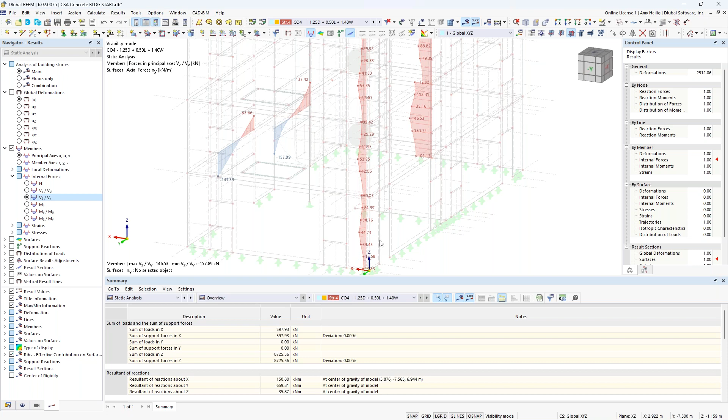Now we can view information such as the shear forces or the bending moments for these shear walls, axial forces, whatever it may be. Remember we had defined those shear walls at the 90-degree angle at the corner—we still have a result beam summing up the internal forces for both of those segments, regardless of whether they're in the same plane or not.

Same concept here for our spandrels. We're summing up the internal forces for this single surface on the left, but both surfaces are summed up here, represented by a one-dimensional member. We can view information like bending moments.

So now with this information, we can take these result beams into the concrete design add-on to actually carry out the design of, let's say, this spandrel as a single 1D member. So if we cancel out the visibility mode here and turn this into wireframe view, I'll create only a visibility of this single spandrel.

I double click here and we can see that this is now represented as a result beam, so this is more or less overlaid on top of that 2D surface. But we have all of the design properties shown to us here.

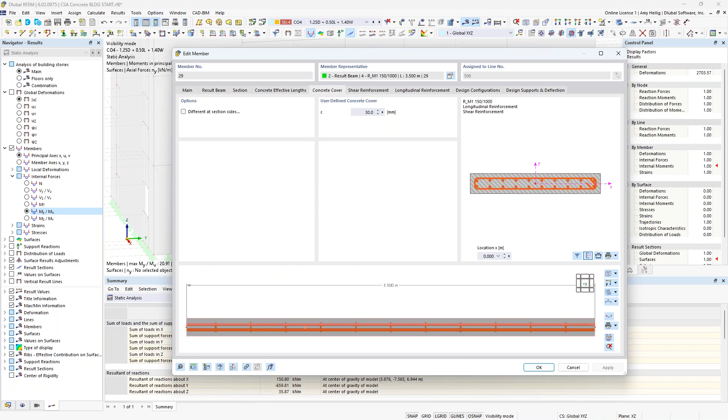We can specify for this spandrel the cover, and the shear reinforcement can also be defined. One thing to point out that may be applicable for topics like shear walls and possibly spandrels is that in the next week or two, we will release the ability to define cross ties that will be taken into consideration with the shear reinforcement as well as the design. Those cross ties can be applied to the longitudinal reinforcement, so keep an eye out for that.

Longitudinal reinforcement can also be defined. You can see here that I specified 4 bars in the corners, but I also utilized the rebar type line to specify 8 additional bars at the top, and we also have 8 additional bars at the bottom, more or less designing this spandrel now as a deep beam.

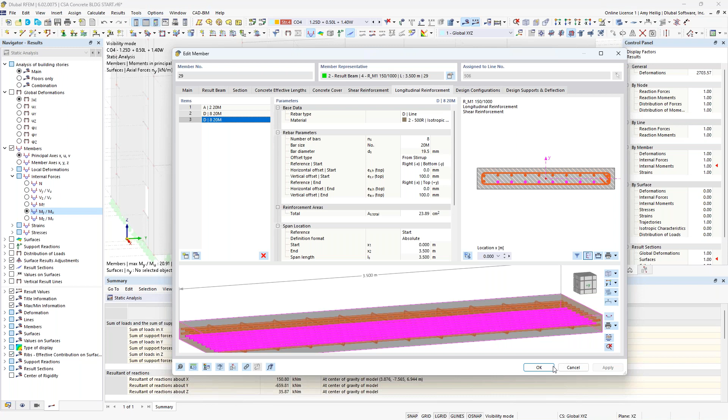Finally, under the concrete design add-on, now that we have input the reinforcement for this result beam, we will also select it here under the objects to design.

Just to quickly show you exactly what the calculation looks like in the last couple minutes here, we'll go ahead and cycle through these load combinations. Notice that it will take just a minute or so longer simply because we have those rigid diaphragm definition types that we need to extract out and do the separate calculation for those 2D elements.

Again, running back through the serviceability calculations for that effective moment of inertia for all of the relevant objects that we have designed, and finally applying the CSA load combinations with the output as we see here with the progress bar. Once this information is complete, everything that we have seen up until this point is the same.

The only thing I wanted to point out here is that we want to jump to the design ratios on the members, and we see that this member is designed as we would any other particular member within the model. We can view the design check details for this result beam, overall just treating this spandrel like a deep beam or a simplified beam to carry out the reinforcement design according to the CSA standard.